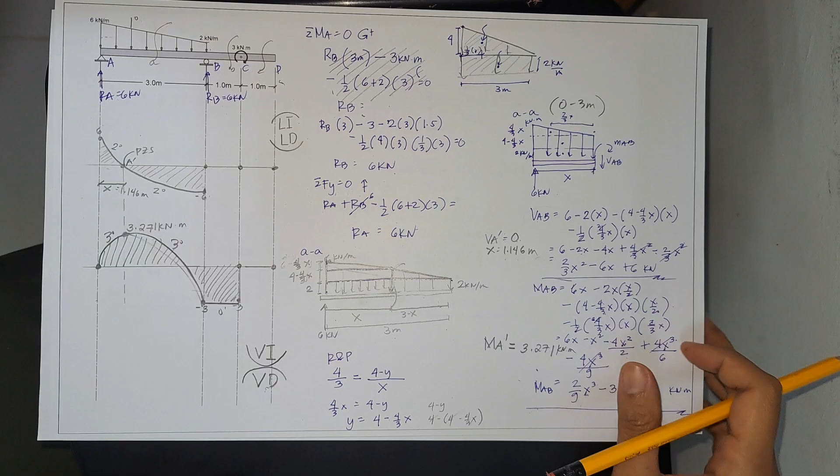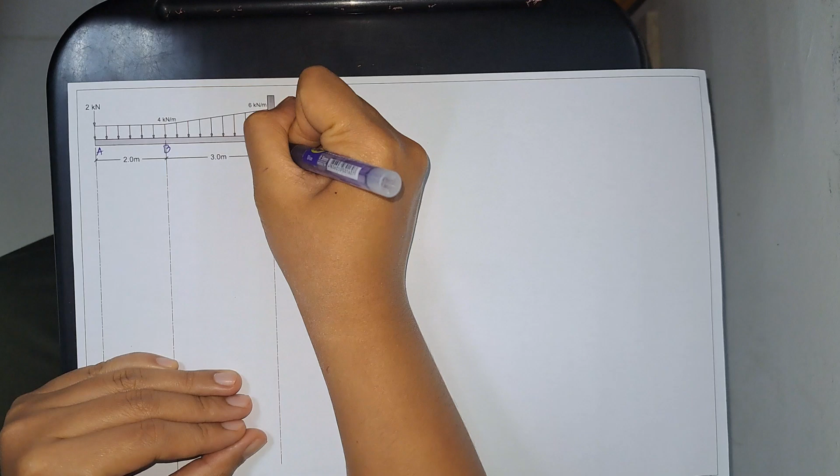We need to identify first the reactions. It's a fixed cantilever, so fixed here means we have a moment. Let's call them A, B, and C. Let's call the moment at point C, and the vertical loading, let's call it CY.

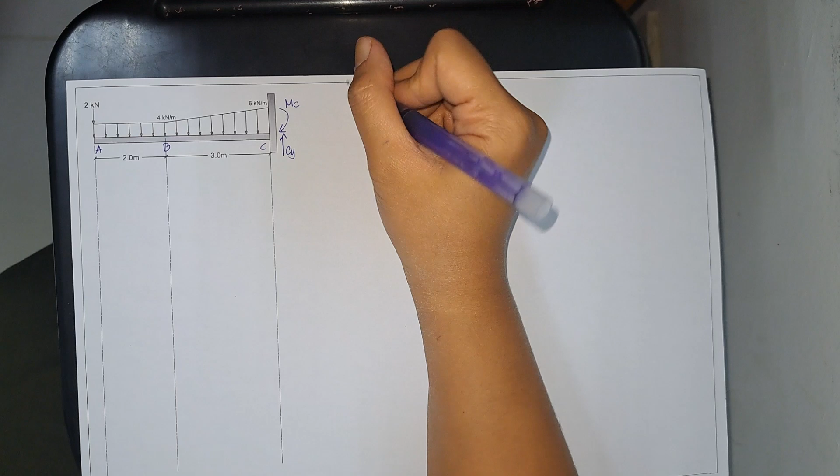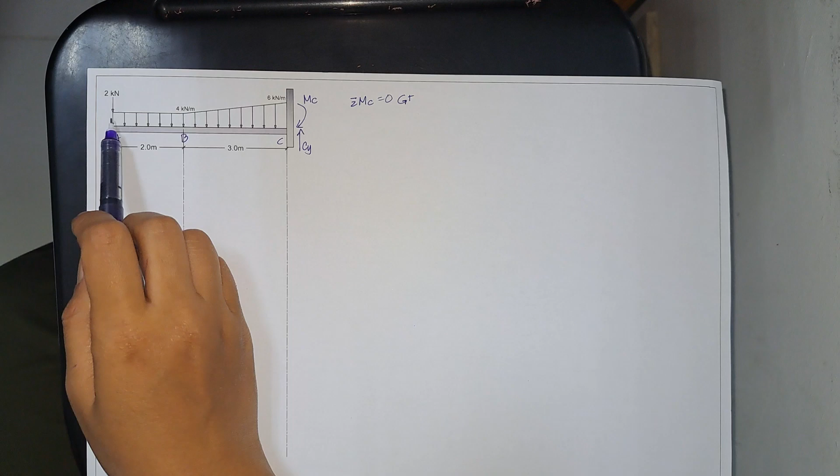Let's do the summation of moment first. Summation of moment at point C is equal to 0, counterclockwise positive. We have a point load here, 2 kilonewton, with moment arm of 5. Next, the rectangular load.

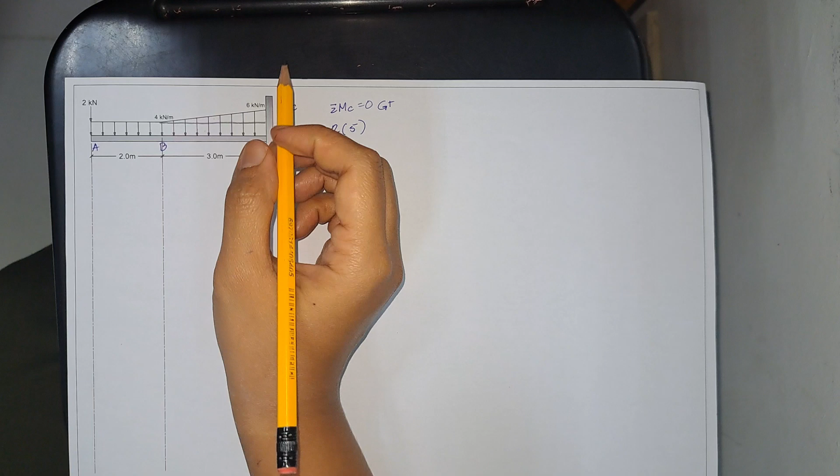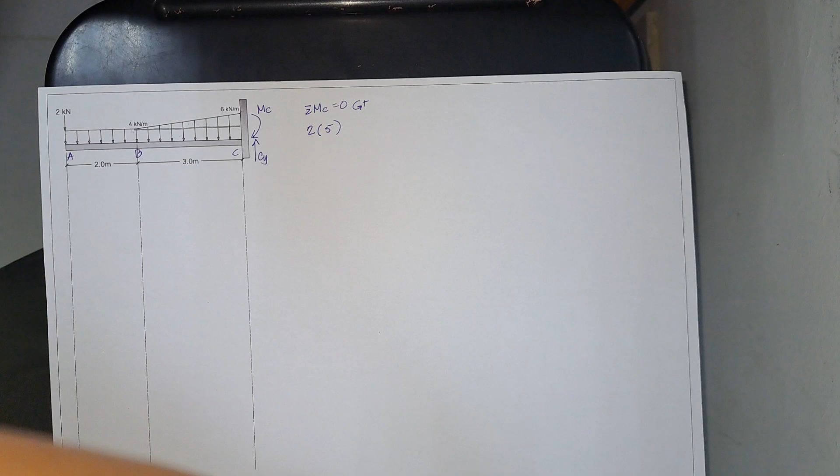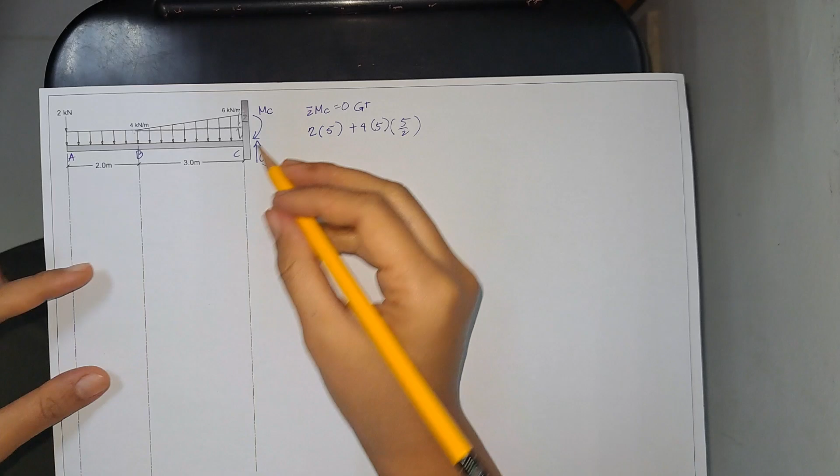And then we have this triangular load on top. If this is 4, that's 4, what remains is 2. So we have plus 1/2 of 2, and the length is 3. The moment arm is from this point to the centroid, 1/3 of 3 meters.

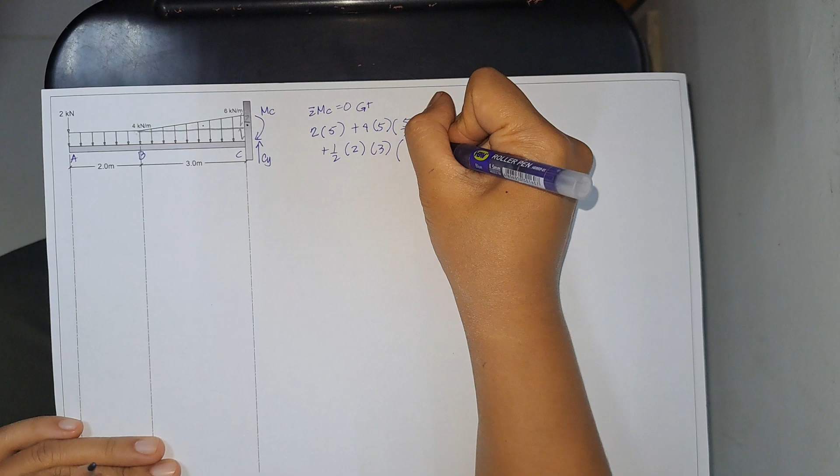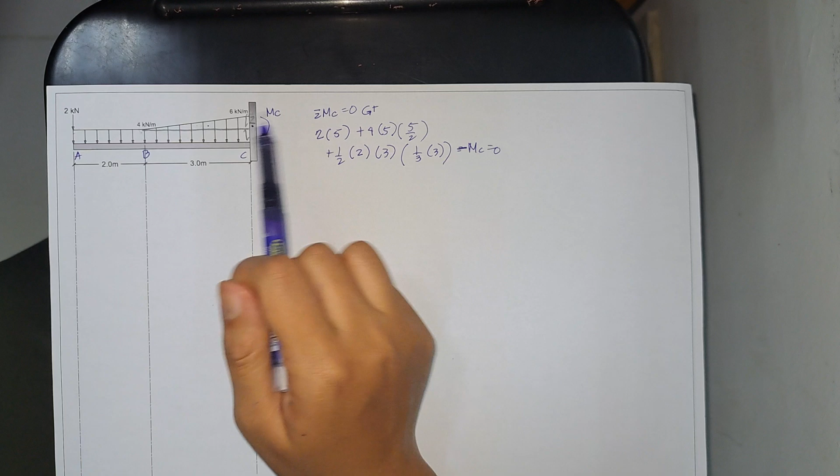This equals plus or minus moment at C equals 0. So let's double check: we have 2 by 5 plus 4, 5, moment arm is 5 over 2, plus 1/2 of 2, then length is 3, 1/3 of 3, minus M.

So we have here 63 kilonewton-meter. Double check: 2 of 5 plus 4 of 5 of 2.5 plus 1/2 of 3 of 2, then 1/3 of 3.

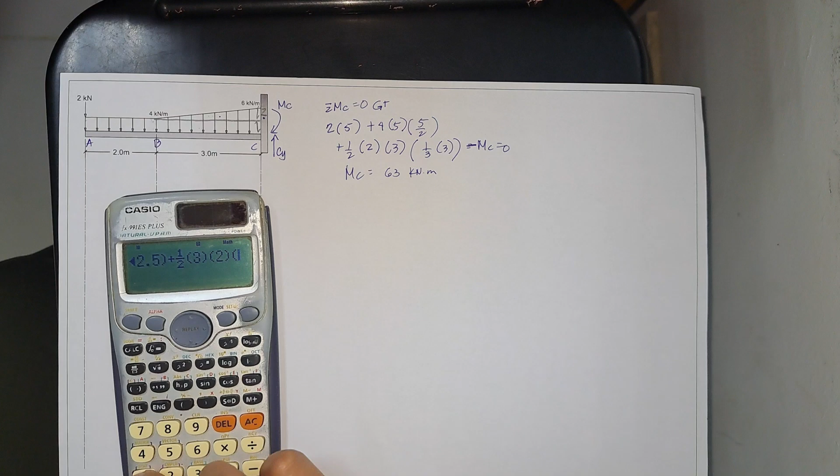So we have 63 kilonewton-meter. Now taking the summation of force vertical equals 0, upward positive, we have negative 2, then take the area of the whole uniformly distributed load: minus 4 by 5, then the triangular loading, minus 1/2 of 2 by 3, plus CY equals 0.

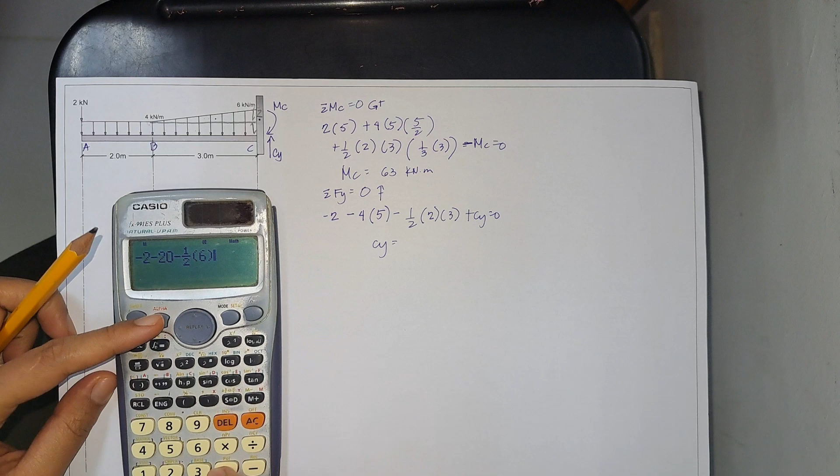Therefore, CY is negative 2 minus 20, 1/2 of 6, plus CY equals 0. So we have here 25 kilonewton.

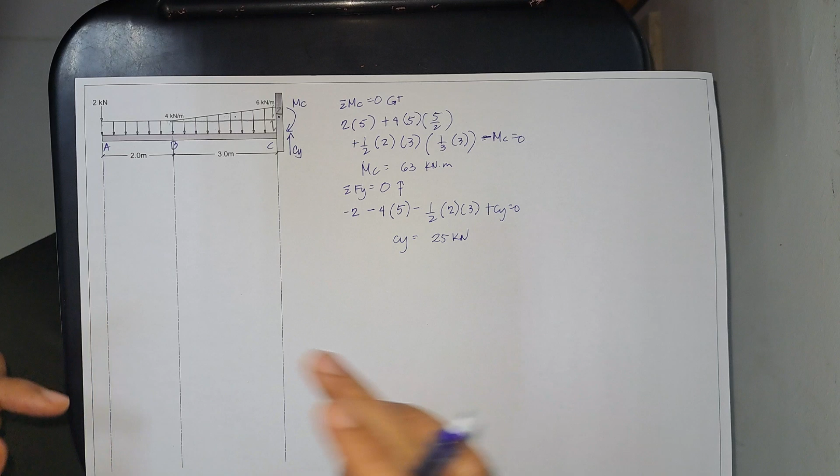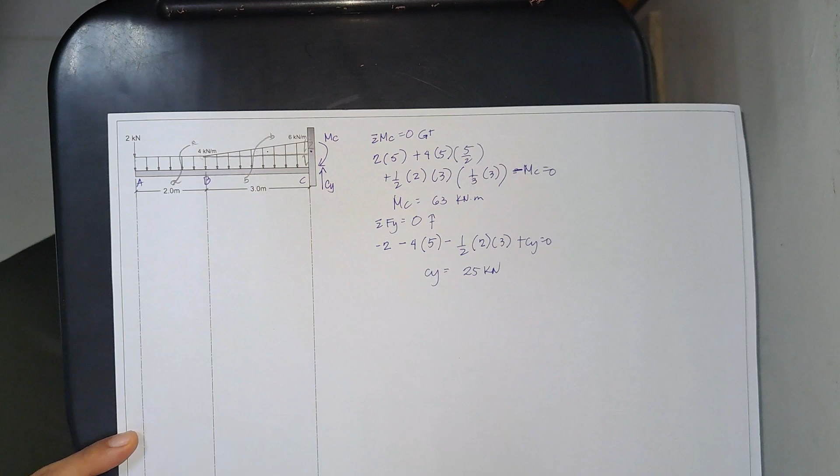Okay, so let's have now the sections. Here we only have two sections: section 1 and section 2. For section AA, let's draw what's on the left side.

So this is 4 kilonewton per meter, then we have a point load of 2 kilonewton, and this is the distance x. Here we have the moment at segment AB, and at the same time the shear at AB.

So the shear at AB is equal to negative 2, then the area of this, minus 4 by x. Therefore we have negative 4x minus 2 kilonewton. So that is now the shear at segment AB, negative 4x minus 2.

And then for the moment at AB, let's just take the moment here. So we have negative 2, moment arm is x, then our rectangular load minus 4x, moment arm is x over 2. So let's arrange it: this becomes negative 2x squared minus 2x.

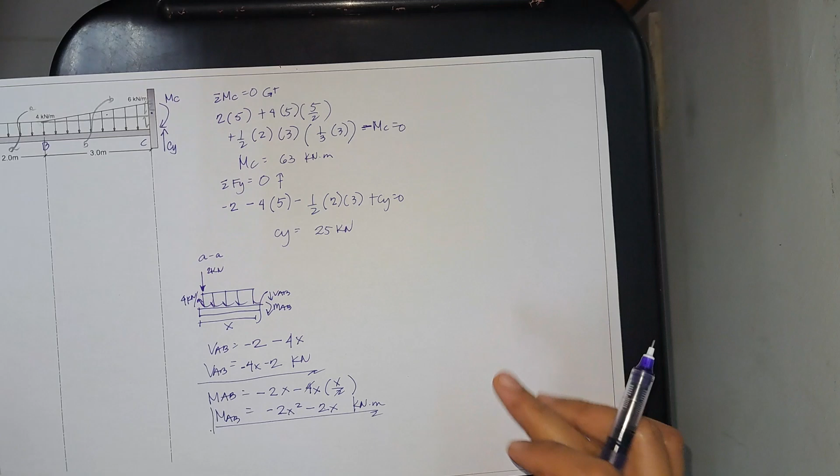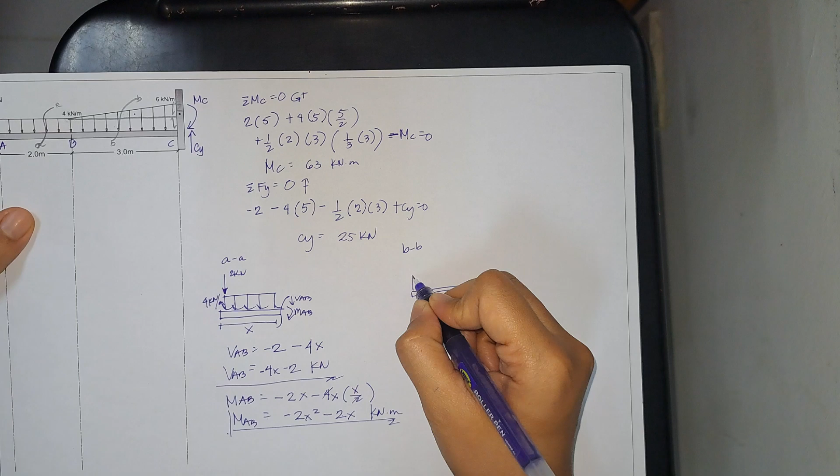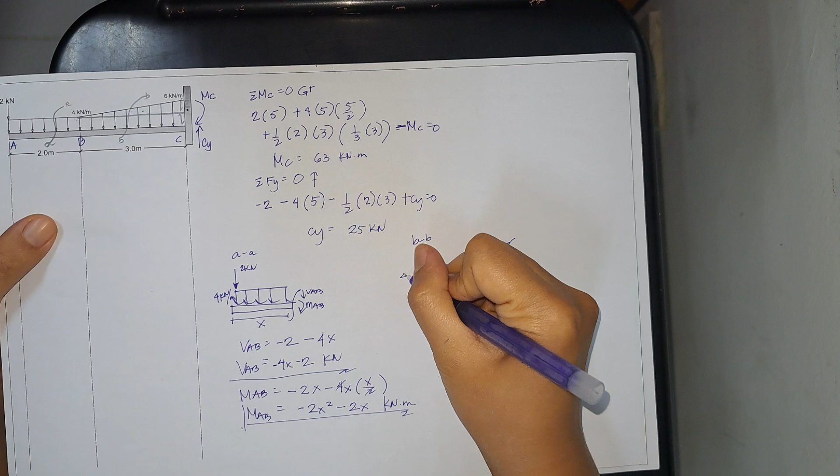Next, let's proceed to segment BC, for BB. What we'll do here is solve it directly so that only the triangular load on top becomes our concern. So this is 4 kilonewton per meter - this is our problem now, what's the value here.

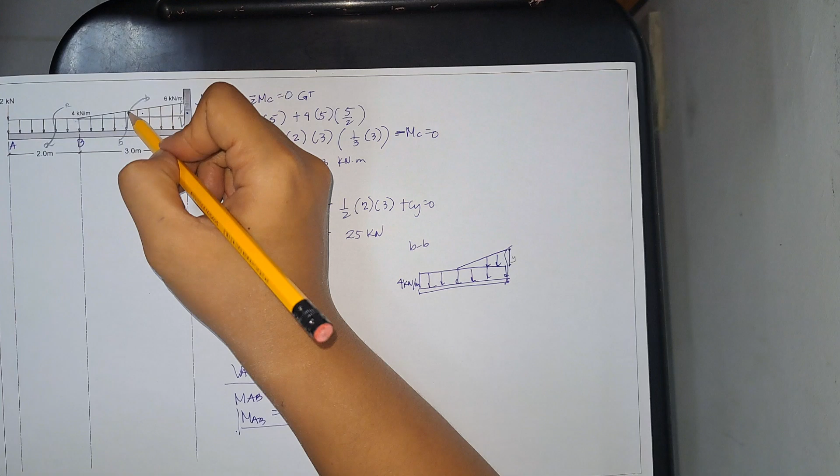Let's call it y, because we made a cut, and the cutting can occur anywhere, so you need to identify the relationship of your cutting point with the distance. Let's call it y. So first the distance, we have 2 meters, then this is x minus 2, and distance x. And the point load of 2 kilonewton.

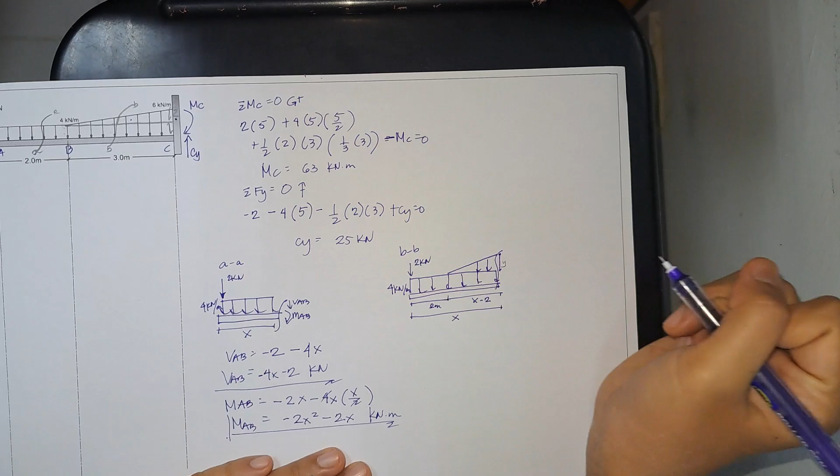So, for this one, to identify the value of y, kailangan mo lang siyang i-extend. Kunin mo yung kabuuan, extend mo. Kagaya ng example natin kanina. So, ito na yung 2, di ba? Kasi 6 yung peak, pero tinanggal na kasi yung nasa baba. So, 6 minus 4, 2 na lang ito. So, 2 kilonewton per meter. Ito, ano yung distance? 3 meters, okay? So, we have here 3 meters.

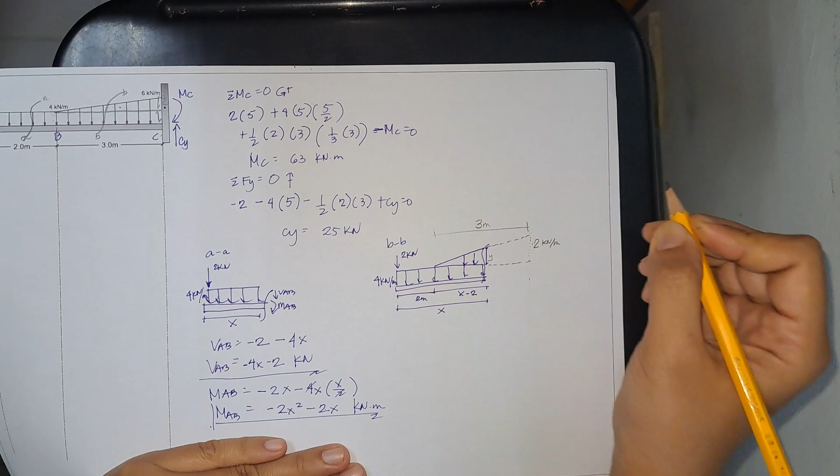So by ratio and proportion, guys, we have 2 all over 3. 2 all over 3 is equal to y all over x minus 2. Okay, therefore y is equal to 2/3 of x minus 2, or 2/3 of x minus 4/3. So meron na po tayong value ng y na okay na to, para mas simplified, mas simple yung pagsulat. Okay lang din naman, 2/3 of x minus 2.

Nandito po yung cutting natin, di ba? So makikita natin na nandito yung shear at segment BC, at the same time yung moment ng BC. So for the shear at segment BC, we now have negative 2. Tapos ito, yung kabuuan nito, area minus 4 by x. Tapos yung nasa taas, minus 1/2 of, ano yung y mo? 2/3 of x minus 2. Tapos this one is x minus 2.

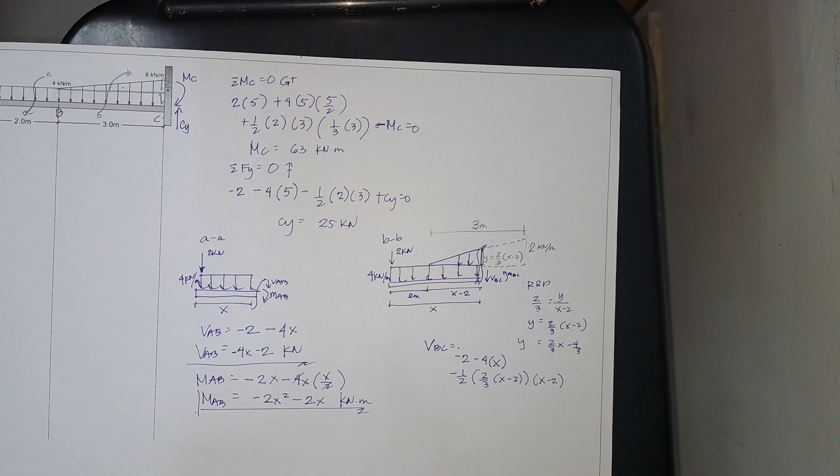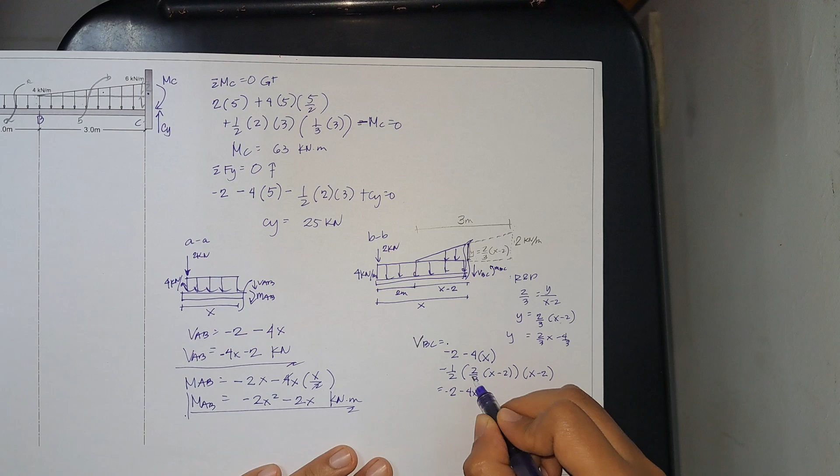Simplify po natin, so magiging negative 2 minus 4x. Pwede na ba nating pagsamahin yan? Pwede nating pagsamahin to, tapos ito magka-cancel. So meron tayong natira na minus 1/3, of x squared minus 4x plus 4. Tama? Negative 2 minus 4x, cancel out na natin yan, so meron tayong natirang 1/3.

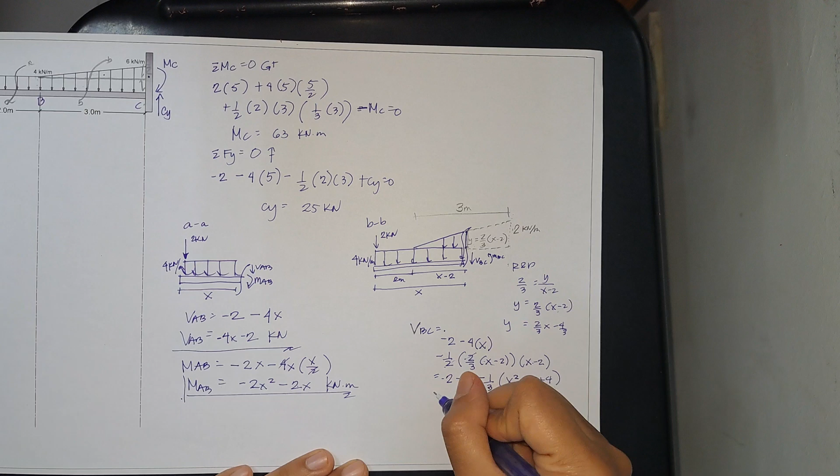Tapos pwede nating pagsamahin ulit to, magiging x squared minus 4x plus 4. Okay, sige i-simplify pa natin. Negative 1/3 of x squared, tapos x naman minus 4 plus 4/3, so we have negative 8/3 of x. Tapos yung constant, we have a negative 2 minus 4/3, negative 2 minus 4/3. Tama, so we have negative 10 all over 3 kilonewton.

So this is now the shear and moment, shear equation for segment BC. And then next, for the moment, dito ko na ilagay kasi hindi na po kasya. So moment at BC, mag-moment lang po tayo dito. Anyway, sabi nga kanina, pwede nyo nang kopyahin to, lagyan nyo na lang ng distance, lagyan nyo na lang ng distance.

So we have here negative 2, ang distance is x. Next, minus 4x, ano yung distance mo? Kalahati nung 2, 4x, kalahati nung x is x all over 2. And then yung triangular loading, minus 1/2 of 2/3 ng x minus 2. Tapos x minus 2, ano yung moment arm? Eh dito tayo nag-base, papunta dito, 1/3. Diba? So 1/3 of x minus 2.

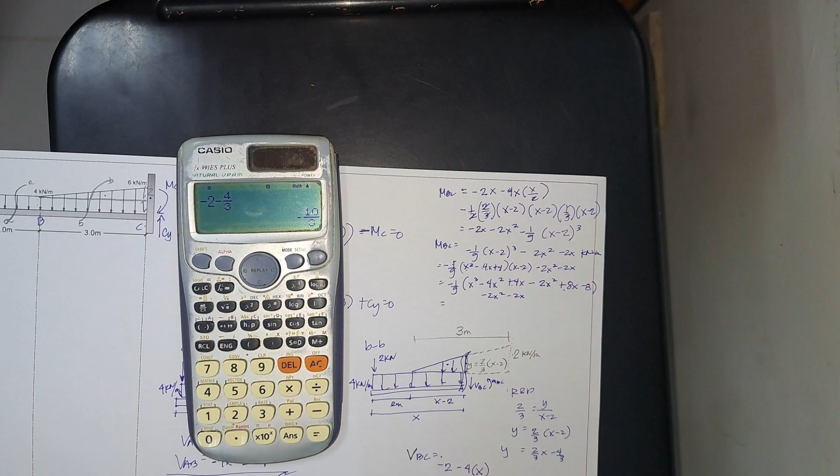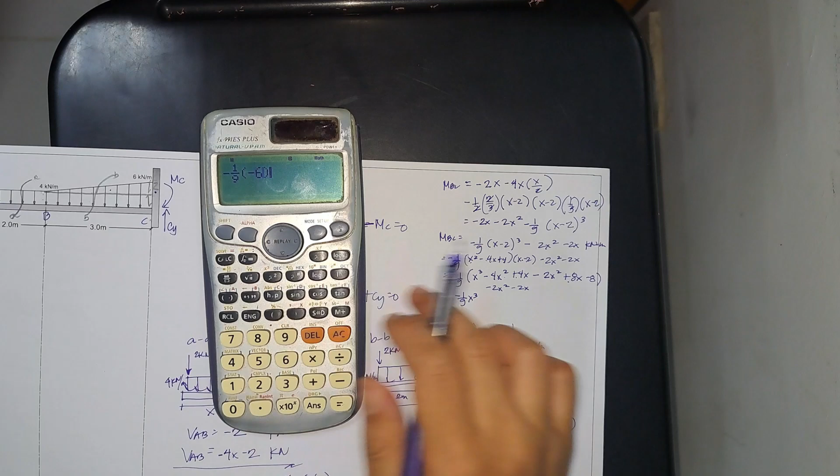Okay, and then distribute natin yung 1/9, and then combine like terms. So we have negative 1/9 of x cube. And then lahat ng may squared, pagsamahin na po natin. So we have negative 1/9, negative 6, negative 6. Okay, and then minus 2, so we have negative 4/3 of x squared.

And then lahat ng may x, so we have here 4 plus 8, 12. So negative 1/9 of 12, 12. And then meron pa tayo dito, minus 2, so we have here negative 10/3 of x. And then yung constant, we have here negative 1/9 of negative 8. Ayan, so we have plus 8 all over 9, okay? Kilonewton meter.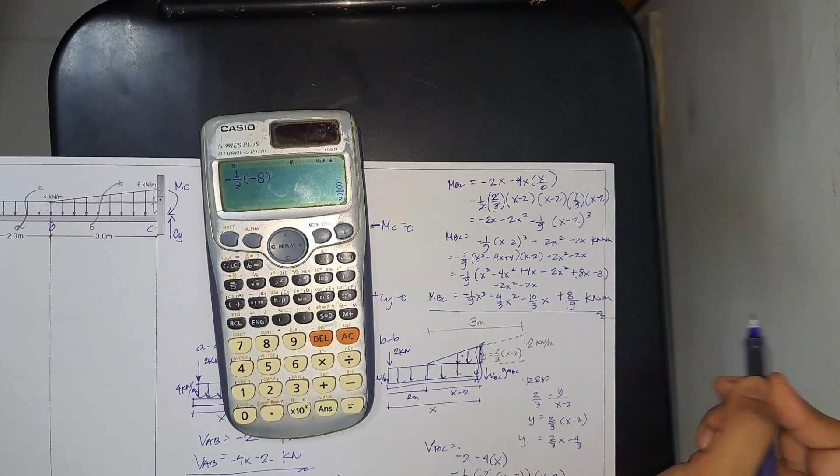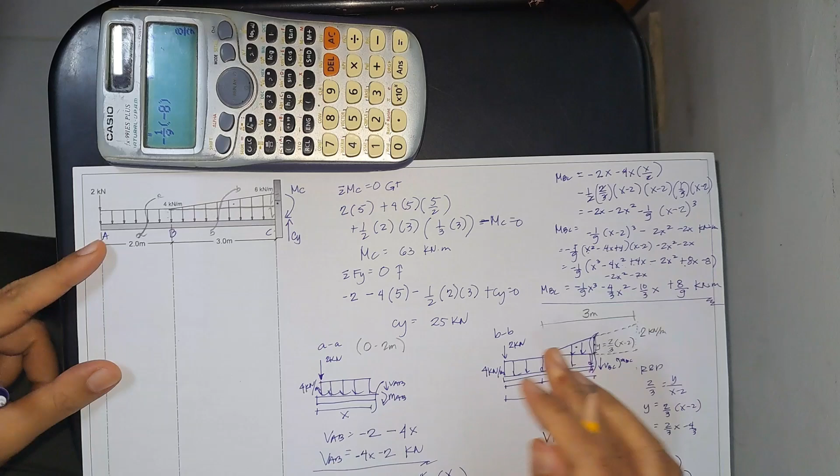Okay, so yan na po yung ating moment diagram, moment equation I should say. Shear and moment equation, okay? So draw na po natin yung diagram. So for segment AB, we will be using the distance 0 to 2 meters, okay, 0 to 2 meters. And then for segment BC, 2 meters to 5 meters.

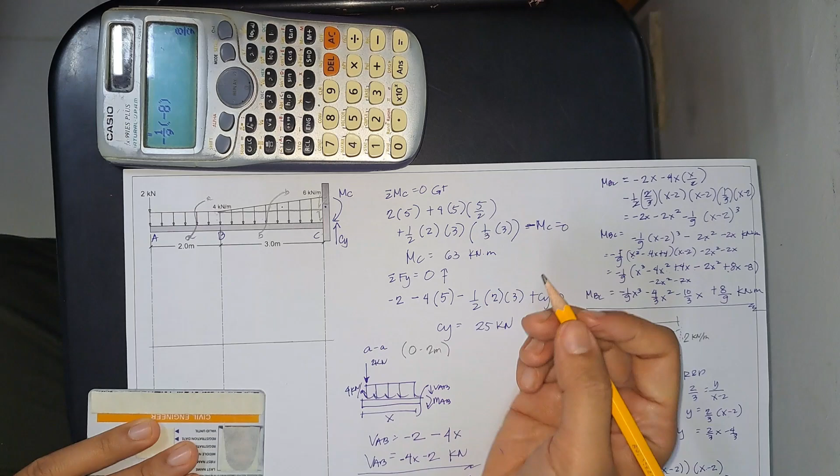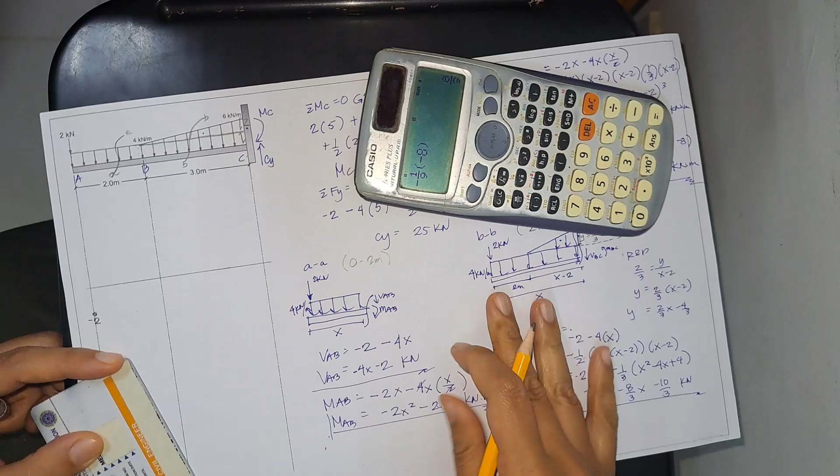So at point A, guys, substitute lang po natin yung x with 0. So matitrace negative 2. Negative 2. Next, at point B, negative 4x minus 2. Ang x po natin ngayon is 2. So, we have negative 10.

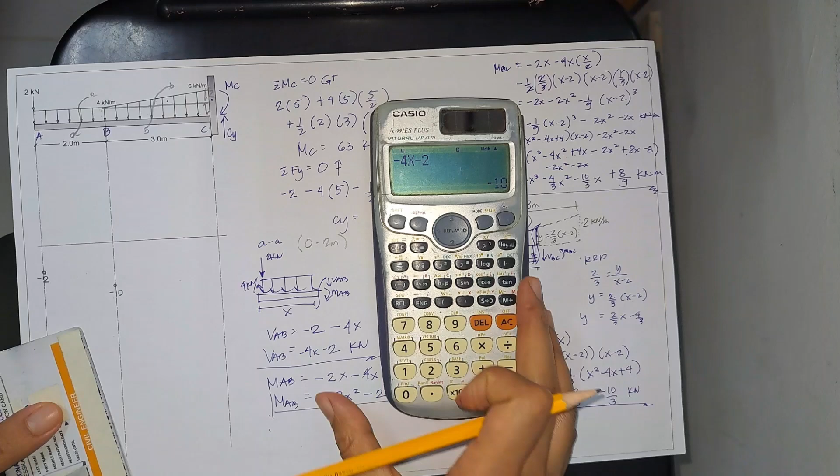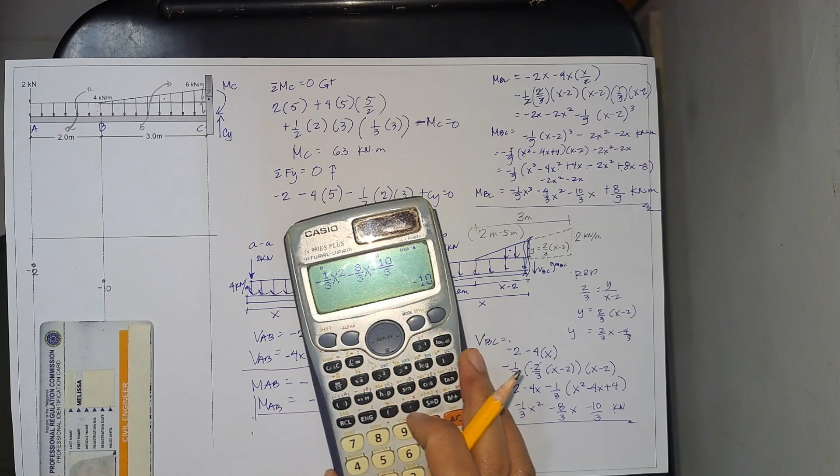Okay. And then, next one, for our segment BC. So, at point B, we have negative 1/3 of x squared minus 8/3 of x minus 10 all over 3. Okay, and then the distance we will be using is 2. So, negative 10, tama. And then next, we have here, at distance 5, so we have negative 25. Okay, so let's connect the dots.

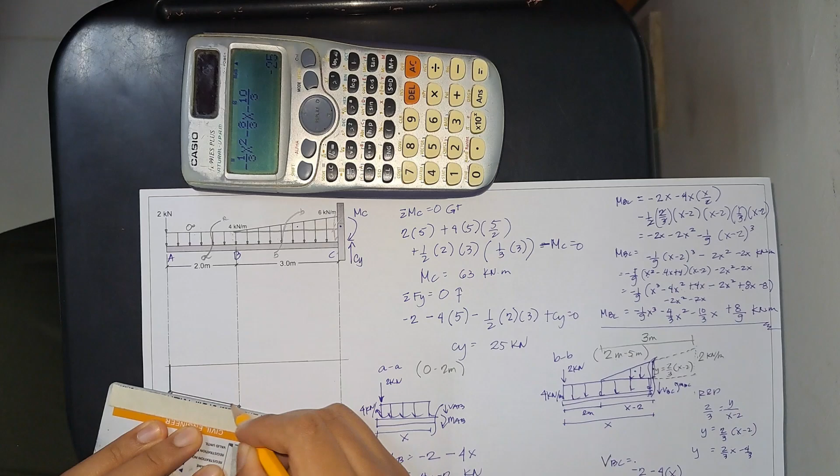Okay, so this is a 0 degree curve. So, connecting the 2, meron tayong force na pababa, 2. Tapos, 0 degree yan. So, straight line lang po yan. And then, this one is a 1 degree curve. So, balikan natin ulit yung notation natin kanina. If the loading diagram is increasing, the shear diagram will concave downward. And if the load diagram is decreasing, it will concave upward.

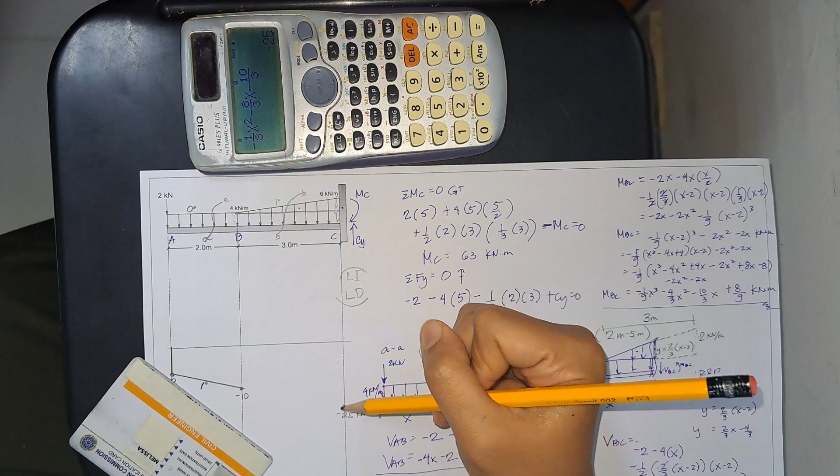Diba? So, dito, yung ating loading diagram is increasing kasi from 4, pumunta siya ng 6. So, there is an increasing. So, therefore, the shear diagram will concave downward. So, paano natin i-connect tong dalawang to? Dapat meron tayong concave downward. I-adjust na natin yung point. So, parang ganyan. Okay? Concave downward.

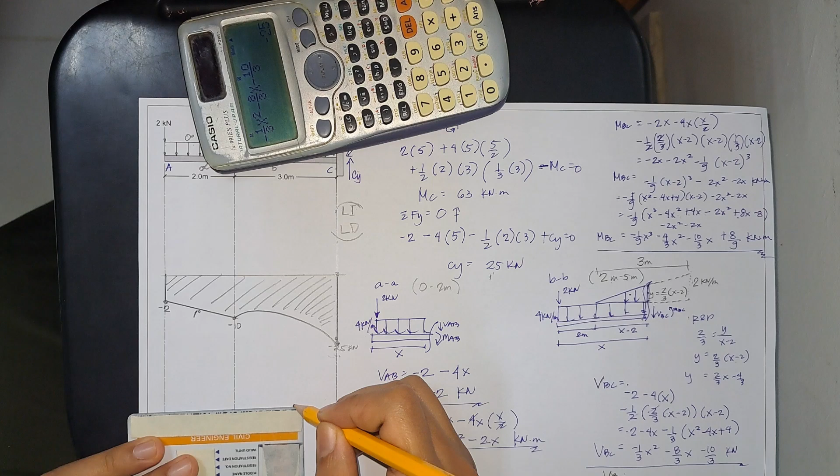And then, so we have here negative 25. Yung CY mo is positive 25. Okay. So, nag-close po yung shear diagram. Negative 25, positive 25. So, ayan po yung ating shear diagram. And for the moment diagram, ganun din po ulit. Substitute lang natin yung value ng x. So, at point A, distance is 0. Therefore, moment at A is 0.

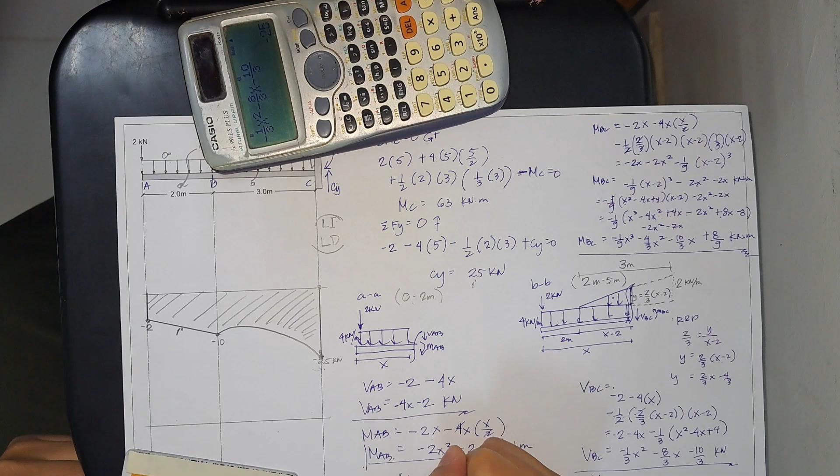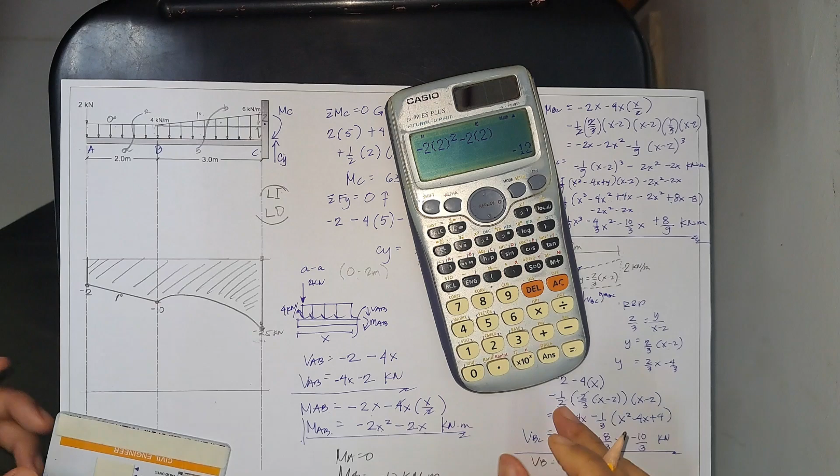And then, moment at point B, substitute mo lang yung x ng distance of 2 meters of 2 squared minus 2 of 2. So, we have negative 12 kilonewton meter. So, from 0, pumunta po siya ng negative 12. And then, this one, dito na natin ma-check kung tama ba yung expansion natin. Dapat ang lumabas na sagot dito for point B is negative 12.

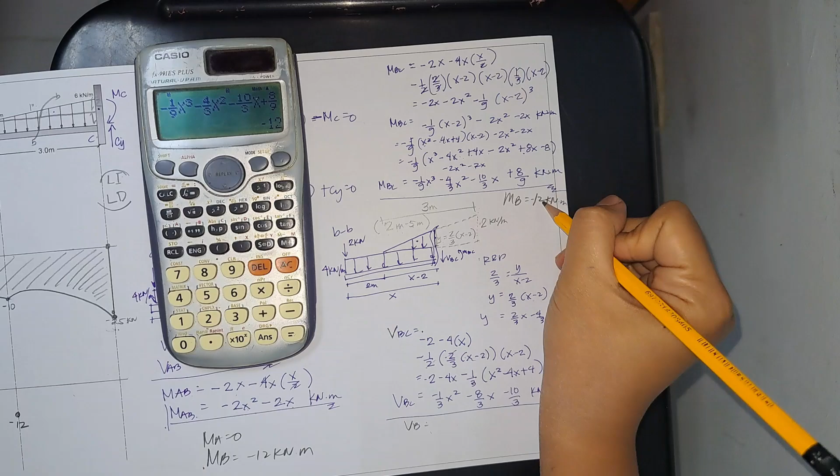So, negative 1/9 of x cube minus 4/3 of x squared minus 10 all over 3 of x plus 8 all over 9. Calculate. Ang distance po natin dito is 2. Okay. Tama yung expansion. So, negative 12. And then, moment at point C with the distance of 5. So, we have negative 63 kilonewton meter. So, point B, negative 12. Point C, negative 63.

Ma'am, hindi po siya nag-0. Hindi po talaga siya magsi-0, kasi ang mag-close dito is yung moment. Ano yung moment at C mo? 63. So, we have negative 63, tapos 63, it will now proceed to 0. So, pag nasa fixed support po tayo, guys, expect po na hindi po 0 yung makukuha nyo dun sa plotting, kasi i-close po siya nung mismong moment.

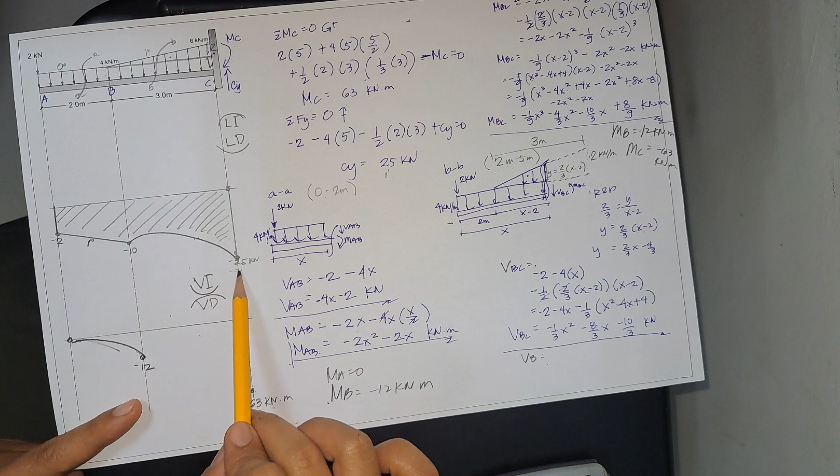Doon mag-0. And then, for the shear diagram, if the shear diagram is increasing, it will concave upward. But if the shear diagram is decreasing, it will concave downward. So, our shear diagram here is decreasing. Therefore, it will connect here using a downward curve, or concave niya is downward. And then, from negative 10 to negative 25, decreasing po ulit siya. So, another concave downward.

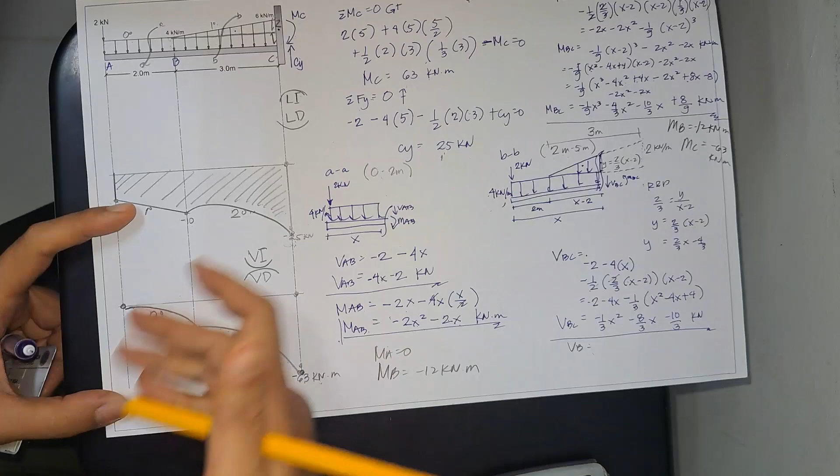I-adjust mo na lang yung point. So, parang ganito. Ayan. So, we now have here a 2 degree curve. So, this is now a 3 degree curve. 2 degree curve. Okay. So, ito na po yung ating moment diagram.

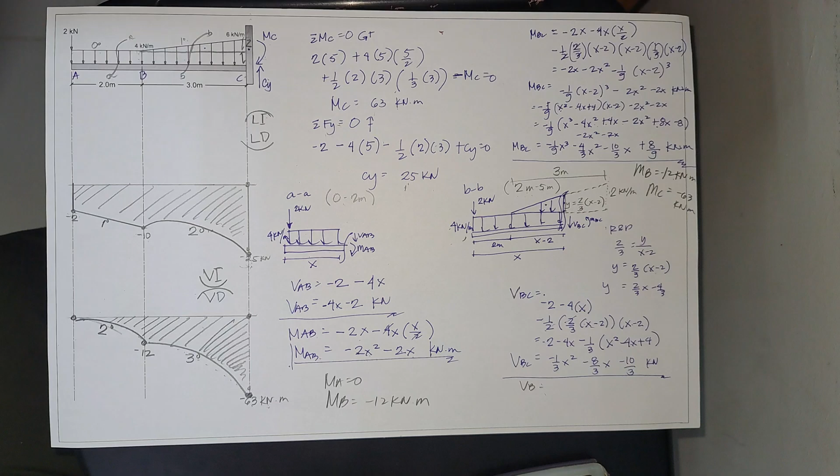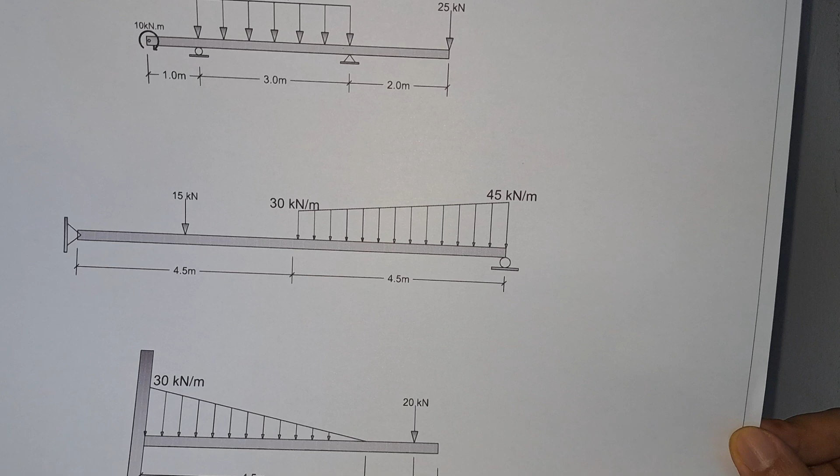So, for practice ng activity natin ngayon, kasi po, I know hindi po ganun kadali yung pagko-compute natin ng shear and moment diagram. So, we need to practice. So, meron po tayo ditong some assignment that you need to pass on our designated meeting next week. Section A is Wednesday, if I'm not mistaken. Section B is Tuesday, and then Section C is Monday. Basta, yung ating designated schedule, ipapasa nyo po.

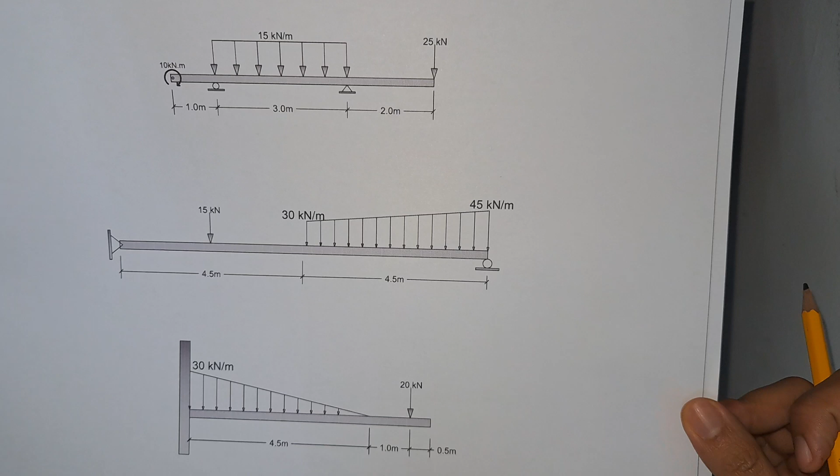So, put this one into a yellow paper. So, do a collaborative work, yung sharing of ideas, para in case na meron kayong hindi naintindihan, magpatulong kayo dun sa mga kasama ninyo. So, by individual po to, pakilagay po sa yellow paper. Pakisubmit po during our meeting next week. So, provide complete solution and illustration.